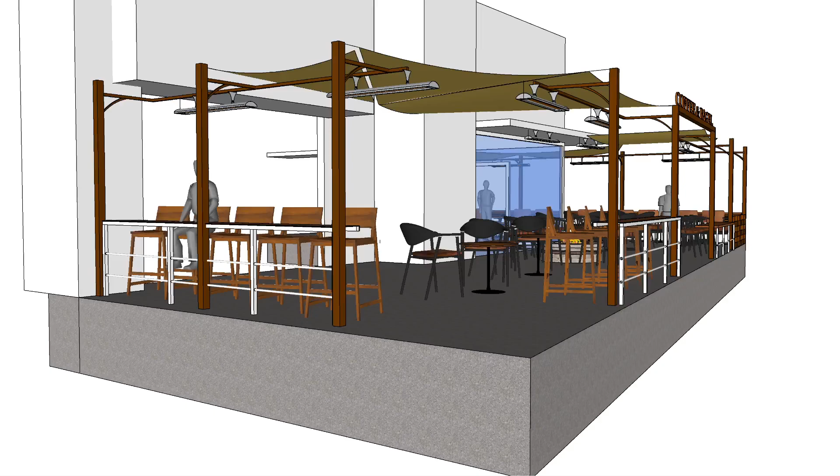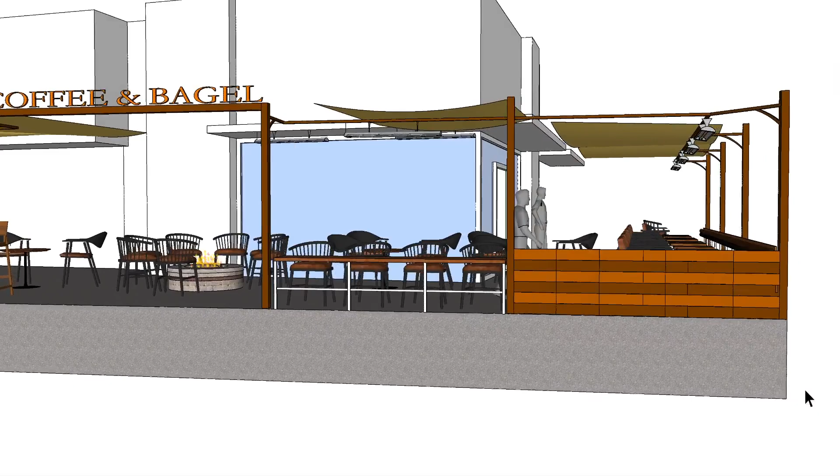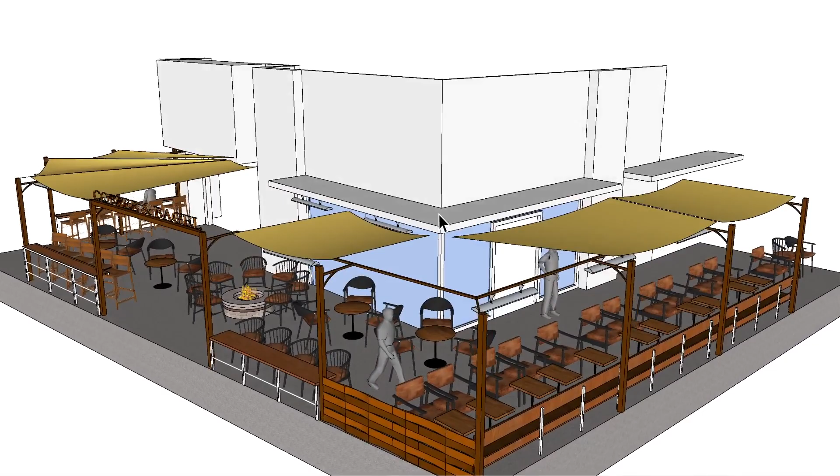Now let's get heating. All right, so here we have this commercial application, and essentially we have some normal seating height here as well as over here, and then we have some bar stool seating height here and over here. There is some additional seating in the middle here, a fireplace down here in the center, and then we have some awning structures above, and then we also have this overhang over here.

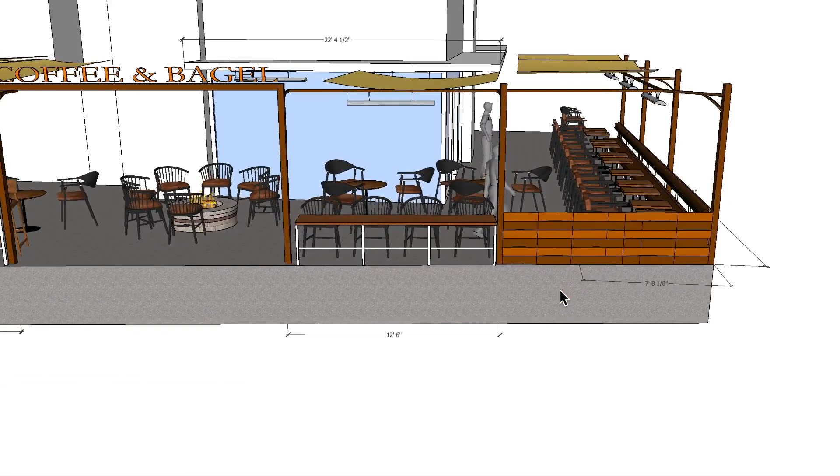Let's go into the overall dimensions that I have. So overall dimensions, I have 40 feet 3 inches from this post here to the outer edge of the post over here. The seating distance I have here is roughly 8 feet, but you'll probably pull the chairs back a little bit, so we'll call it 8 foot. This seating table here I have at 12 foot 6. This bar stool I have at 14.6, and then this bar stool area over here I have at about 14.10,

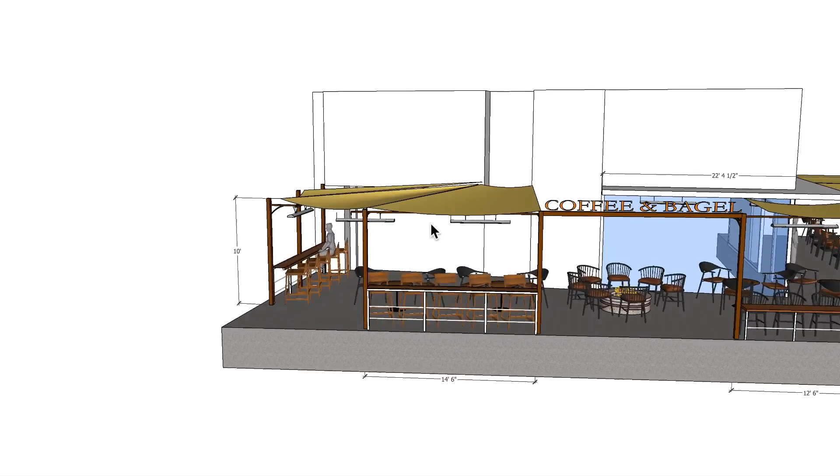let's say. We have an overall height of the post at 10 foot off the finished floor, and I have the awnings starting at that position, and then I have a 6-inch droop as far as the awning structure itself. So just bear that in mind. That is important with regards to clearances. Let's see if there's anything else. I think that's about it.

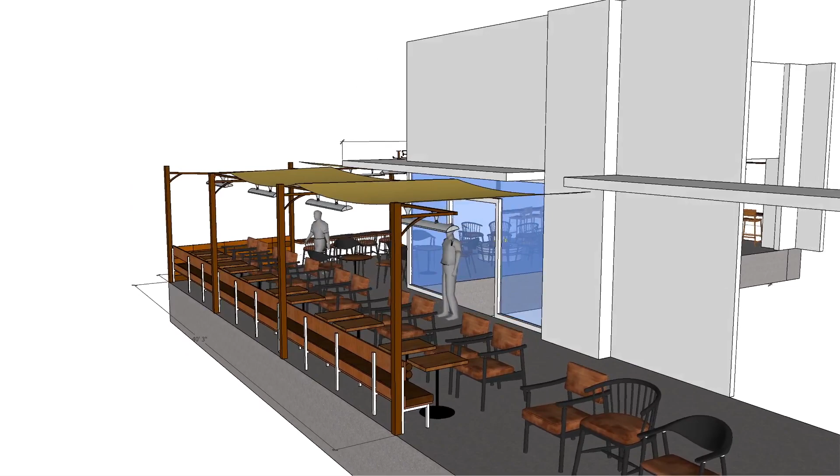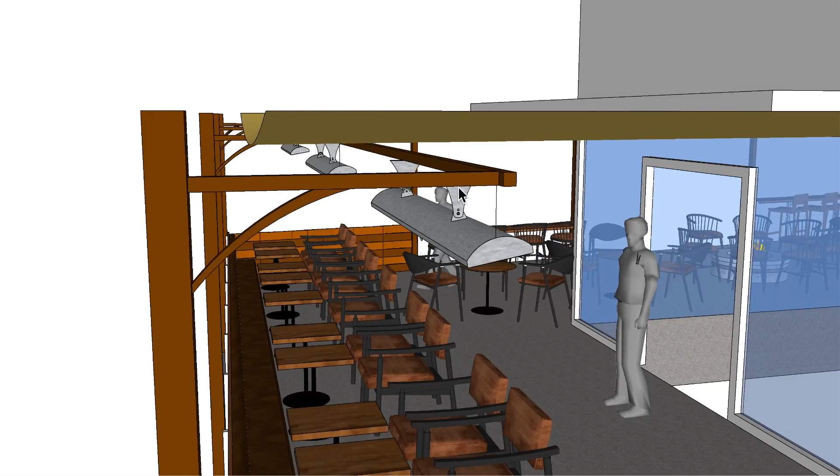So what I've done here, you can obviously see we have several units here. I'm going to turn off the dimensions for right now. So what I've done here is I've taken just a bar and made my own support for the heaters themselves. They're 18 pounds a piece, so you'd have to come up with some sort of structural design for this support, but I brought it down so that it's just below that 6-inch droop, and then I supported the heaters based off of the bottom edge of that.

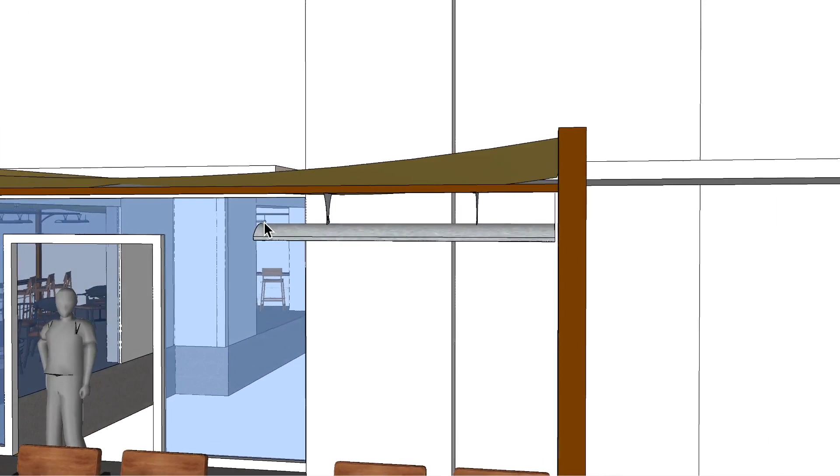You can actually go an additional 1 inch higher, just based on what that true droop might be. If it's 6 inches, then the top edge of the heater needs to be a minimum of 6 inches at the lowest point here to any combustible above the heater itself. So just bear that in mind, 6 inches from the top edge to any combustible above.

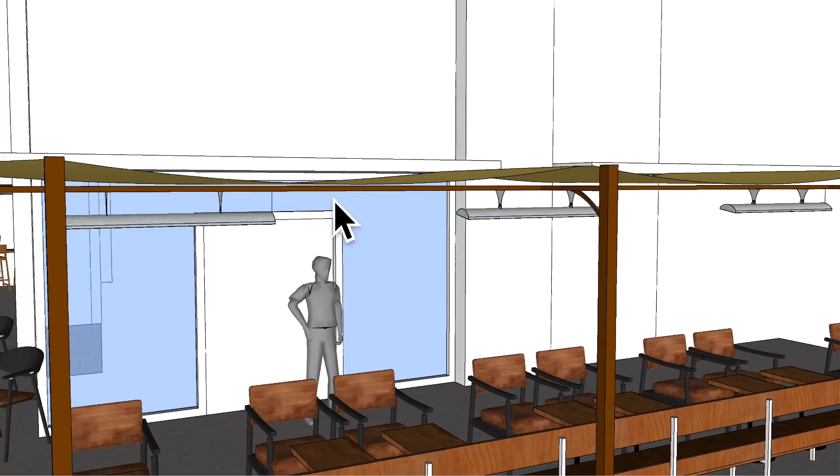And that's why I just decided to go ahead and put a bar 6 inches down. It's actually 7 inches, I should say. So we're more than 6 inches of clearance. We're about 8 inches of clearance from this lower edge. Now, that's if it's a 6-inch droop.

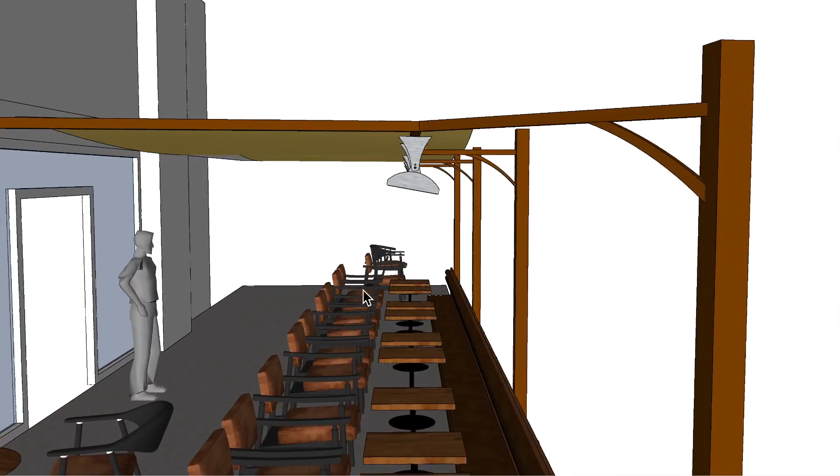All right, so you can see that the different seating heights here are different seating types. This is more of a reclining space over here. What I've done is I brought this bar out 3 feet from the center point here to the center point here, and then I mounted the heaters to it, and I put a 10-degree tilt onto that heater so that we got nice good coverage over here.

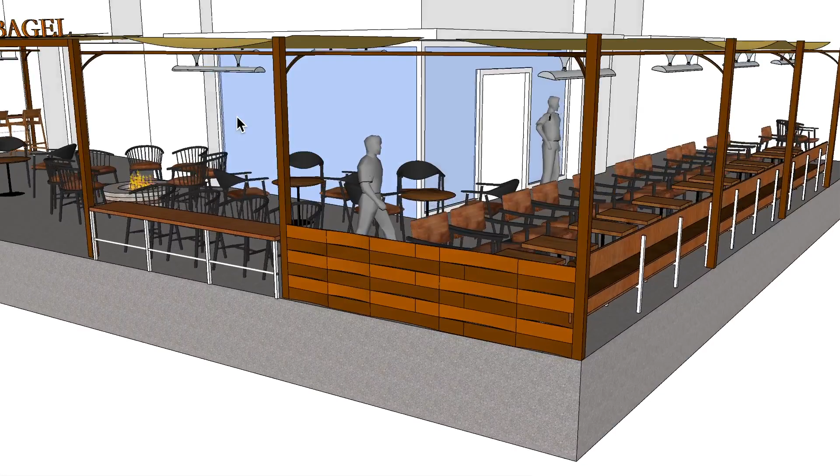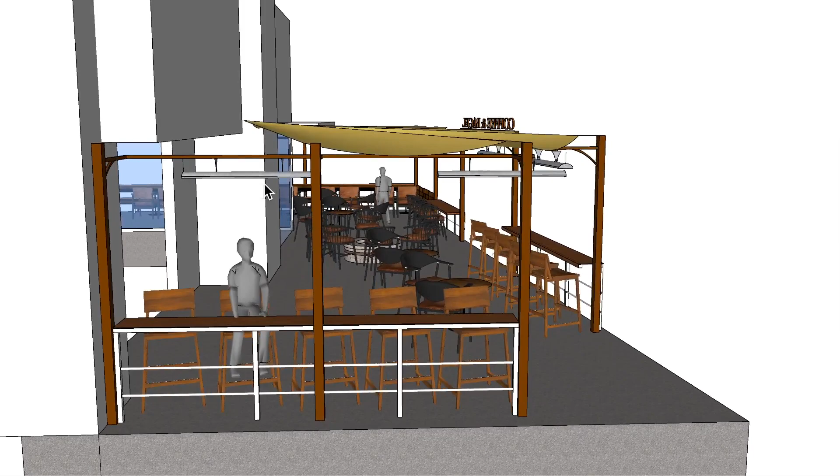Over here I just have that 3 foot out from this edge over here, and then just point it straight down. You'll see why here in a minute. And same with this distance over here. So these are all 6,000 watt units at 240 volts, 25 amps a piece. And as far as the distance apart from each other, I have these I think at 10 foot 8, so you may want to pull these in just slightly based on what the true occupied space is over here.

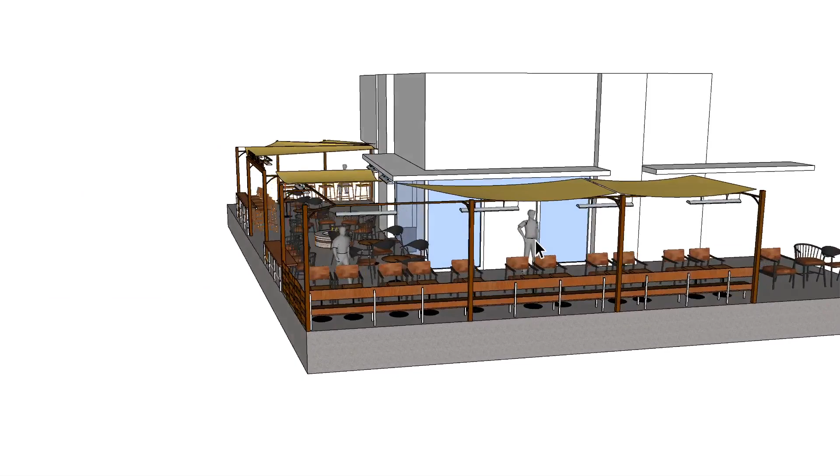Going back to this area over here, I have these at 10 foot 8, and I've done that just so that we can spread the heat out as uniformly as possible. With a 6,000 watt unit and this seating height here, this is going to be just fine as far as that's concerned. I have 1 here in the center and then 2 over here. Again, you may want to bring this one in based on what this left hand side occupied space really is.

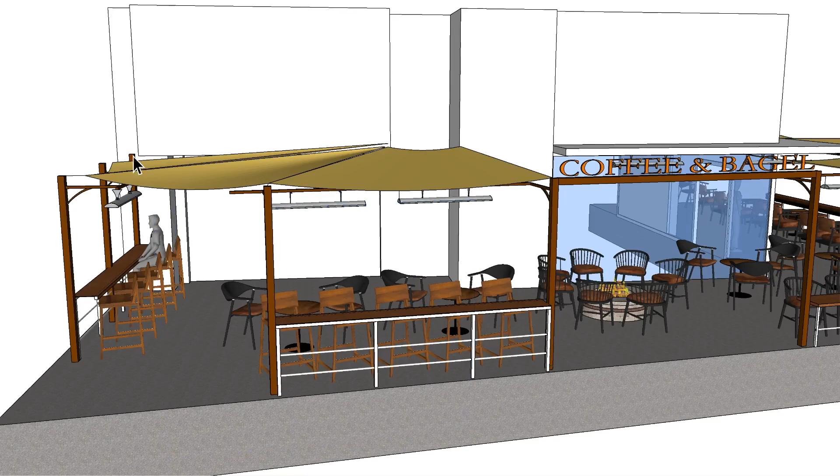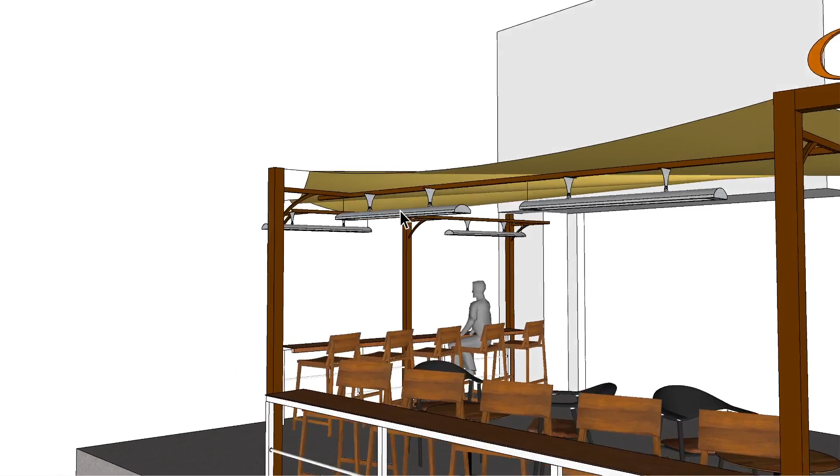Now what I would also mention is that these being 6,000 watts probably would be too hot for the seating height of a bar stool, so you might want to go with a control system that allows you to dim it from 1% on to 100% on, or maybe go to a 4,000 watt unit. Even a 4,000 watt unit I would consider with a dimmer switch, or a 3,000 watt unit. They're all the same configuration as far as the dimensions are concerned. This one here is a CD6024 6000 watt 240 volt again.

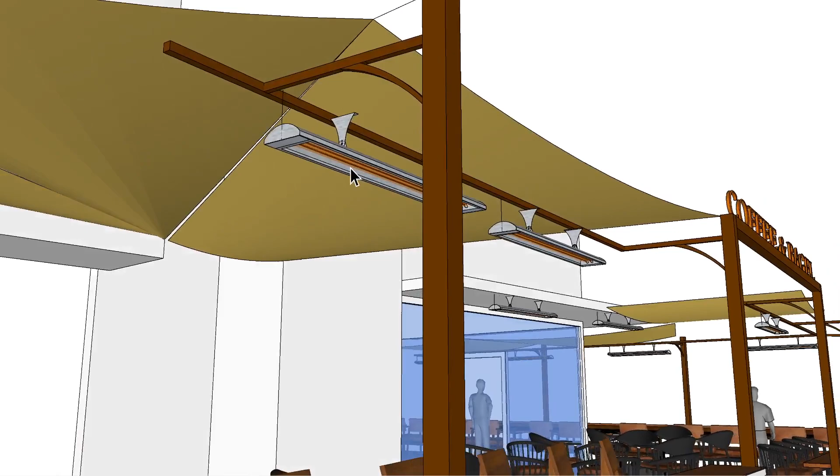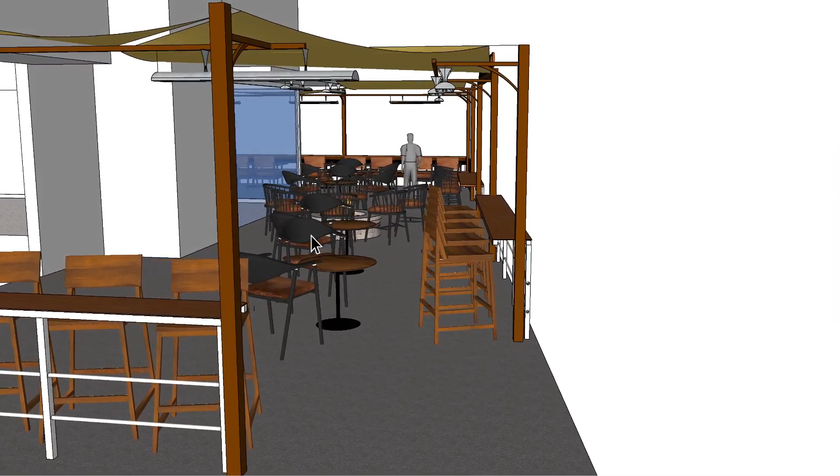And I have these all pointed straight down because we're really not going to cover much of this area here if I put the angle out. So it's best just to heat up the space below rather than trying to heat up some other space inside here. You can capture some of this, but, see, I made a little mistake here when I moved it, so let me just push that back there. The majority of heat is going to be really absorbed or appreciated just below the heater itself.

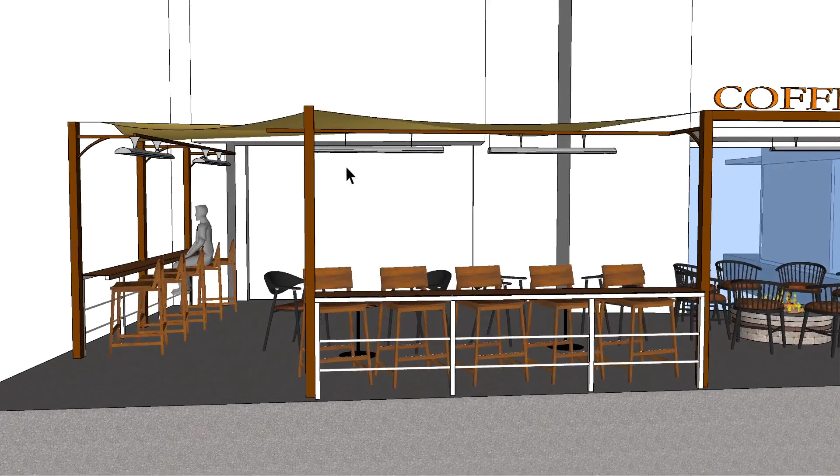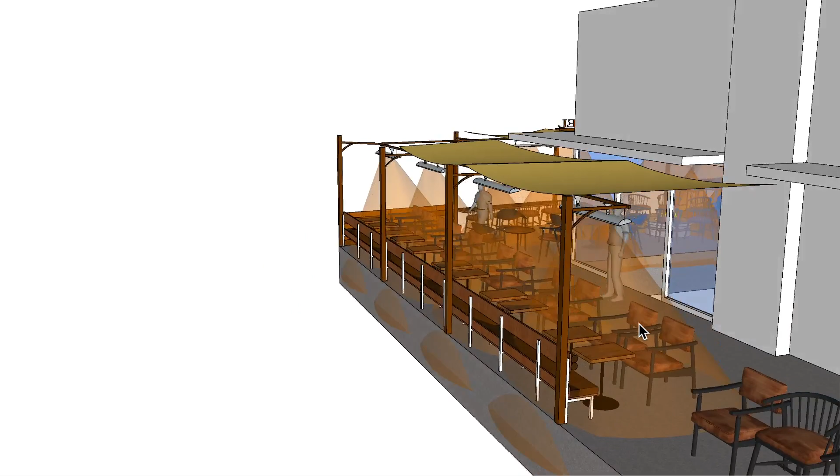So again, maybe a 4000, maybe a 3000, or 4000 with a control; 6000 with a control would also be fine for these specific 4 units over here. These over here you're probably going to want at that 6000 watt the majority of time. So all right, let's go ahead and look at the footprint of heat. You can see that we have a very good coverage throughout this span over here. So I have all these chairs here nicely covered.

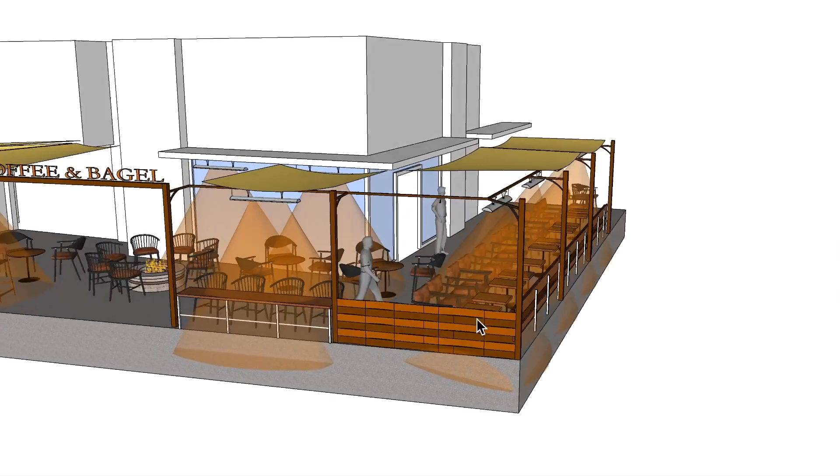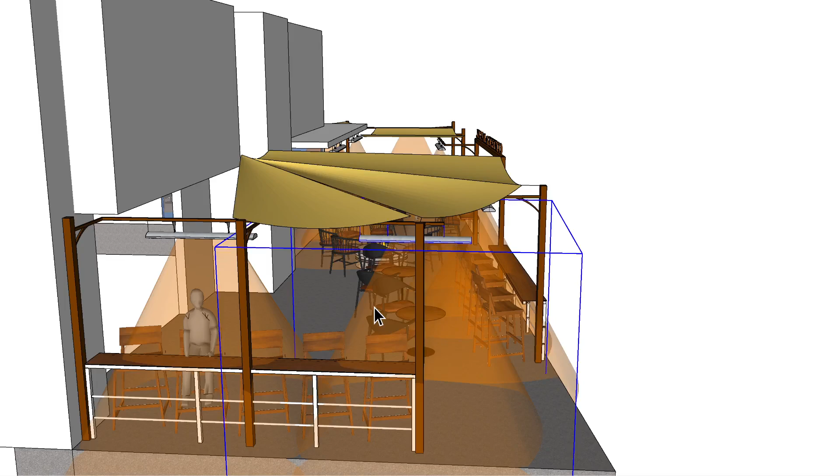There is a slight amount of missing points over here. So I guess you could move them closer and put an extra unit in here, but I think that would be overkill after you went with that 5th unit on this side here. Over here, you can see that we're capturing the 2 centers just fine, and also half of the outer chairs over here. And then again, moving these a little bit closer, you can see that we're capturing these 5 seats over here just fine, and the same is true over here. You'd probably want to move this unit over, maybe 2 feet, something like that.

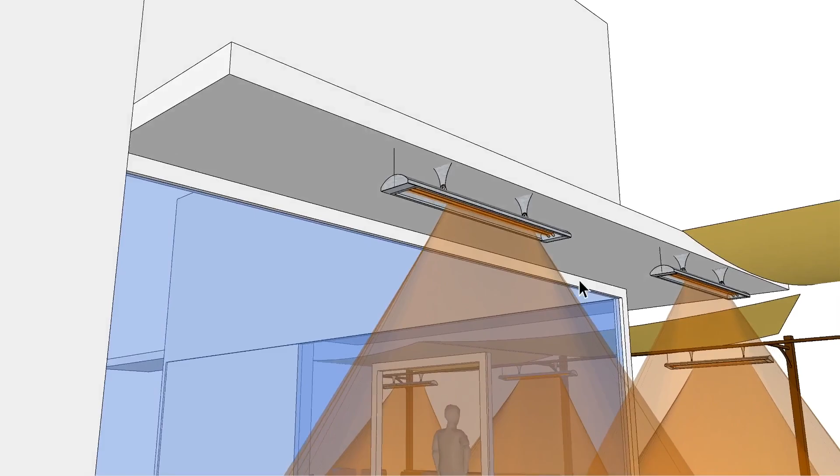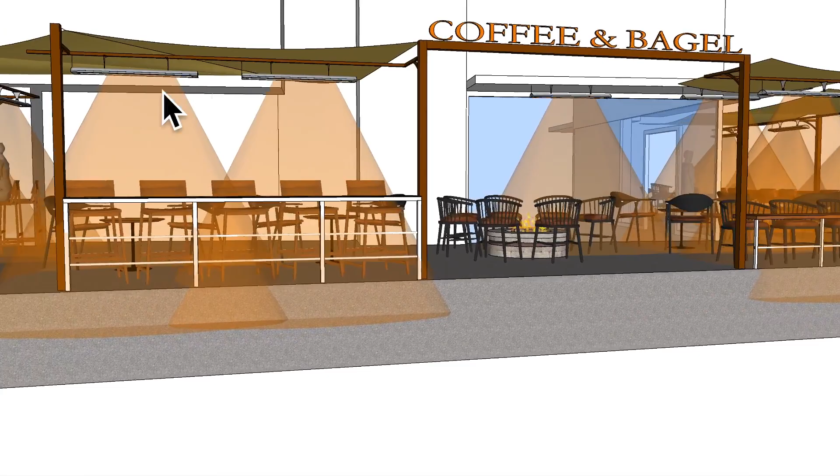And again, consider using a control system at least. And then also you'll see here I have 2 units, 6000 watt units placed over this edge over here, and they're just pointed straight down to the ground, and that would heat up this space here fairly decently. We're not really heating up the entire fireplace section, nor are we heating up this space over here, but I'm not sure that would be a good idea. There's a sign here, and I'm not sure that we can really place anything over here. I think this is an entry exit point as well as this over here. So all right, I think this is about it.